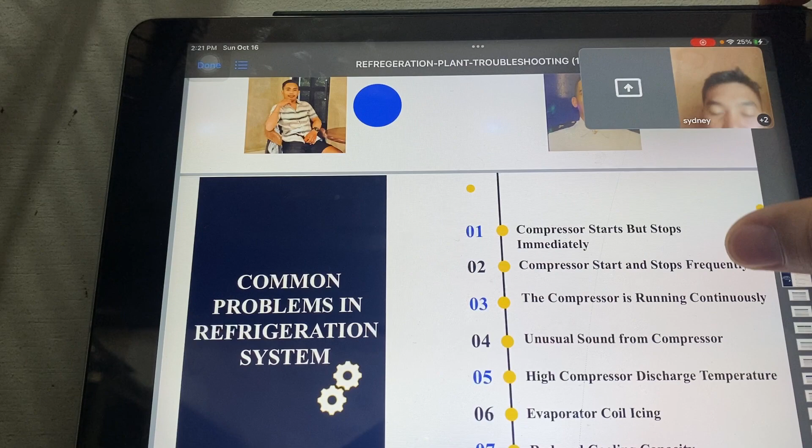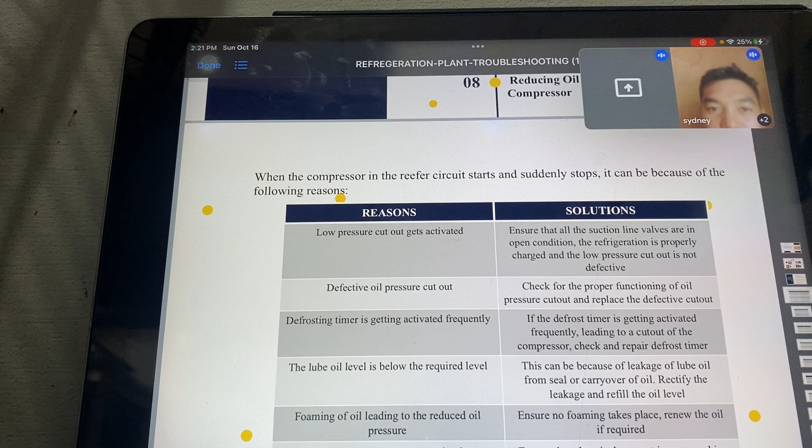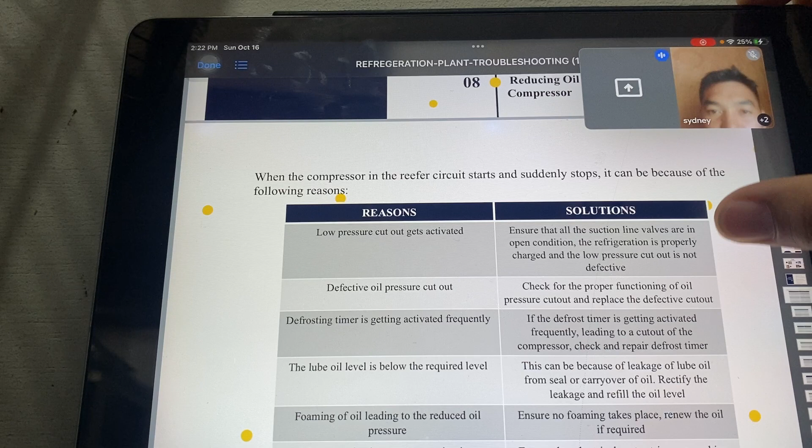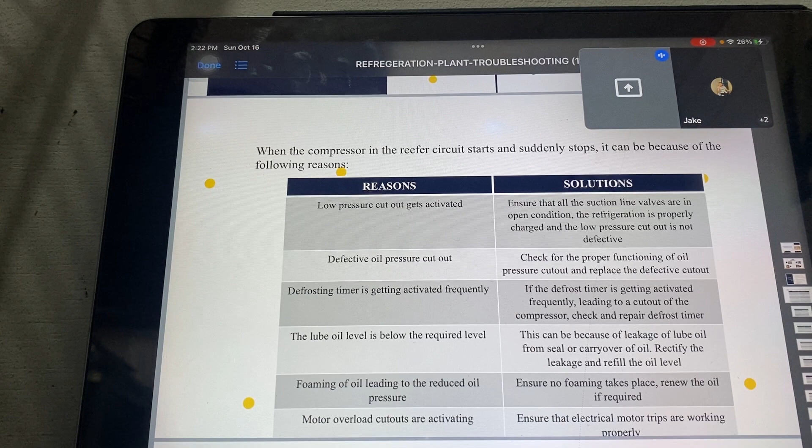So, the low pressure cutout gets activated. Second is defective oil pressure cutout. Third, the defrosting timer is getting activated frequently. Fourth, the lube oil level is below the required level. Fifth, foaming of oil leading to reduced oil pressure. Sixth, motor overload cutouts are activating.

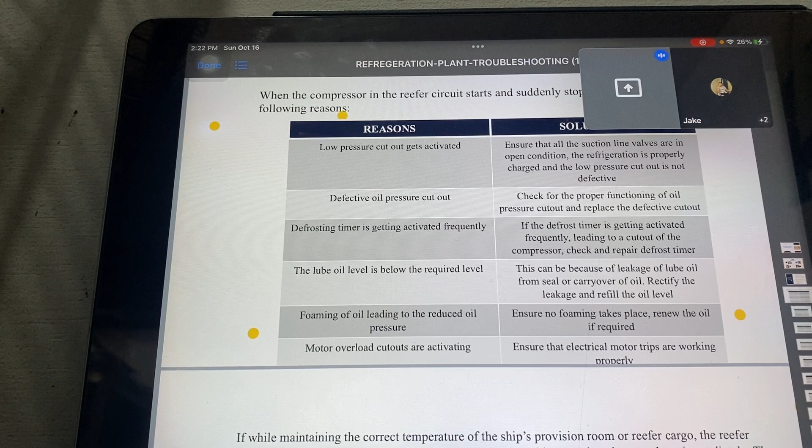So in troubleshooting, the solution for this is: first, ensure that all the suction line valves are in open condition, the refrigerant is properly charged, and the low pressure cutout is not defective.

Second, check for the proper functioning of the oil pressure cutout and replace the defective cutout. Third, if the defrost timer is getting activated frequently leading to a cutout of the compressor, check and repair the defrost timer. Fourth, this can be because of leakage of lube oil from seals or carryover of oil. Rectify the leakage and refill the oil level.

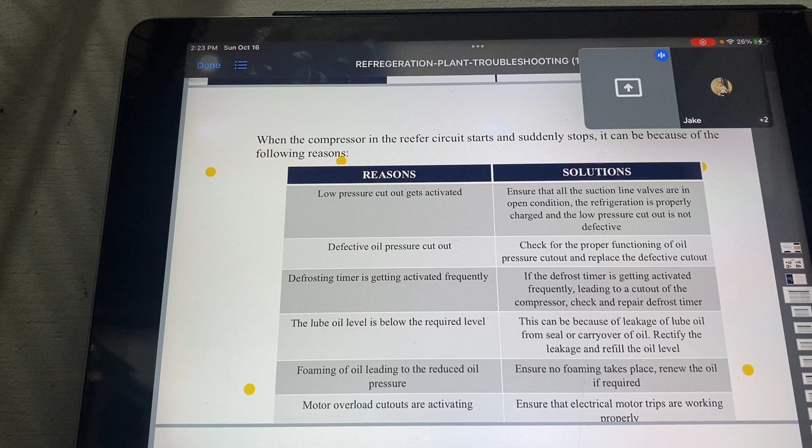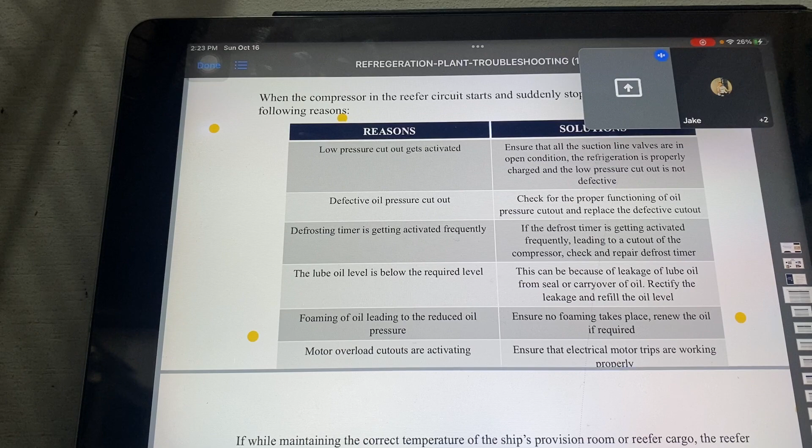Next, ensure foaming does not take place; renew the oil if required. Sixth, ensure that electrical motor trips are working properly.

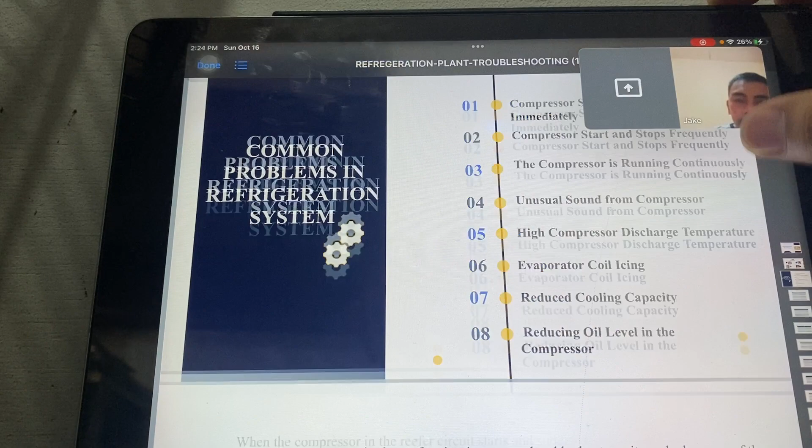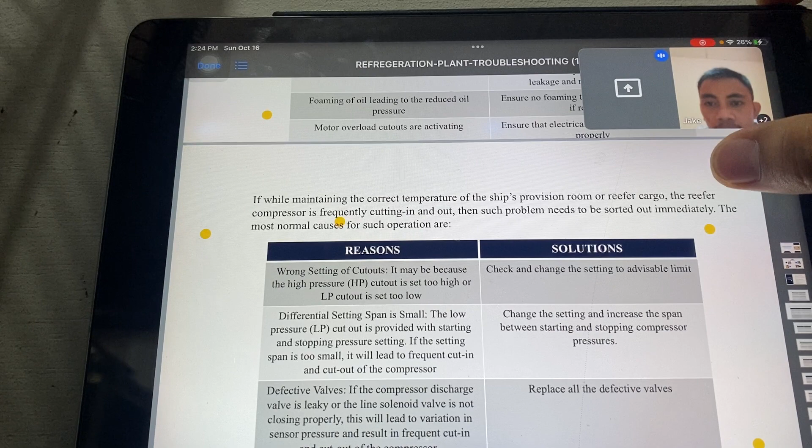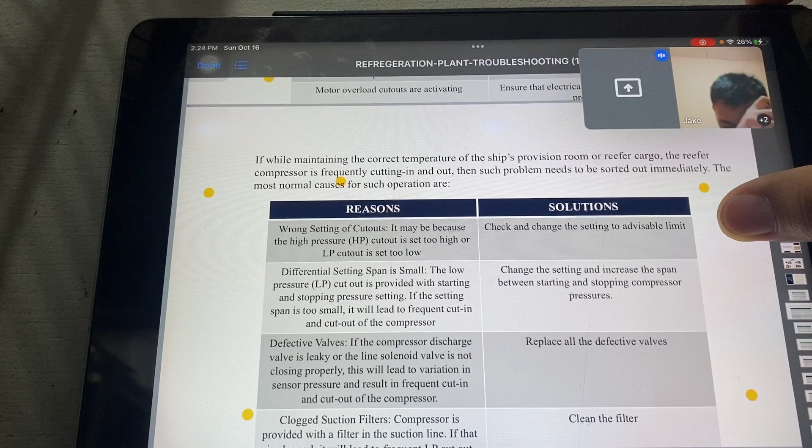So the second problem is the compressor starting and stopping frequently. While maintaining the correct temperature of the ship's provision room or reefer cargo, the reefer compressor is frequently cutting in and out. Such a problem needs to be sorted out immediately. These are the most common causes for such operation, and the reasons why it starts or stops frequently.

First is wrong setting of cutouts. It may be because the high pressure (HP) cutout is set too high or the low pressure (LP) cutout is set too low, or the differential setting span is too small. The low pressure LP cutout is provided with a starting and stopping pressure setting. If the setting span is too small, it will lead to frequent cut-in and cut-out of the compressor, so it will not work correctly.

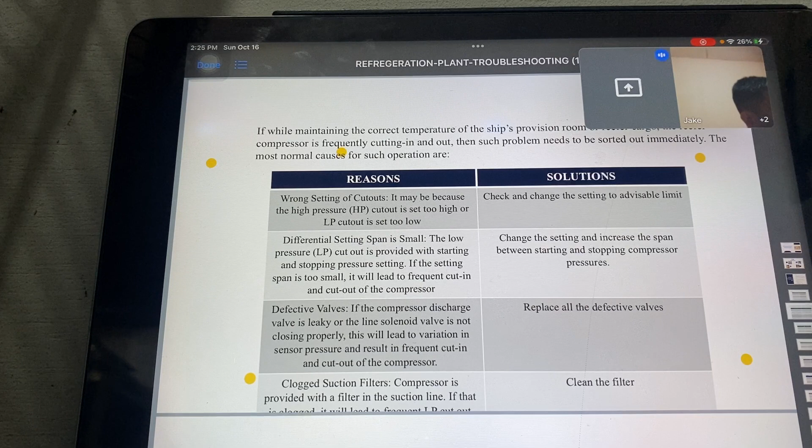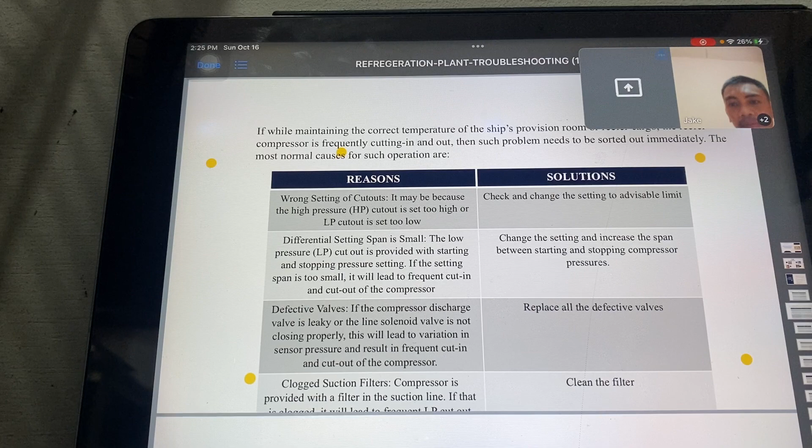Next is defective valves. If the compressor discharge valve is leaky or the line solenoid valve is not closing properly, this will lead to variation in sensor pressure, resulting in frequent cut-in and cut-out of the compressor. Next is a clogged suction filter. The compressor is provided with a filter in the suction line. If that is clogged, it will frequently trip the low pressure cutout.

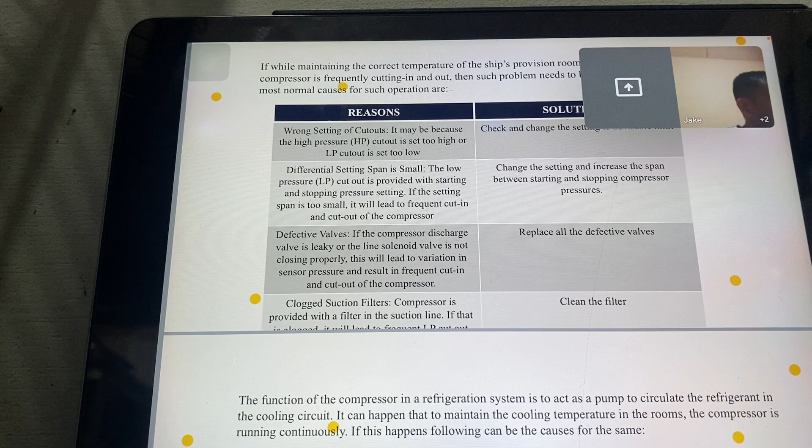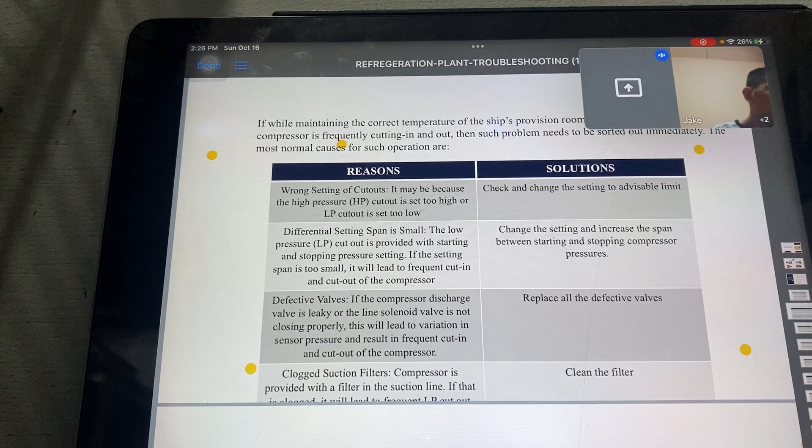So this is the solution: always check and change the setting to the advisable limit. Change the settings and increase the span between the starting and stopping compressor pressure. Replace all the defective valves. Clean the filter.

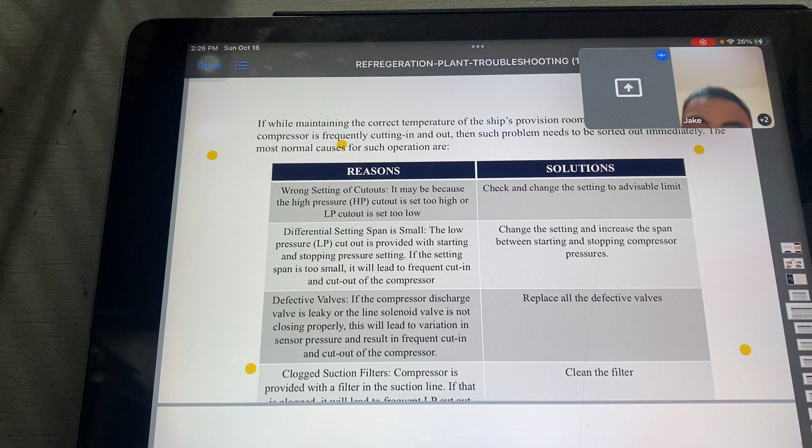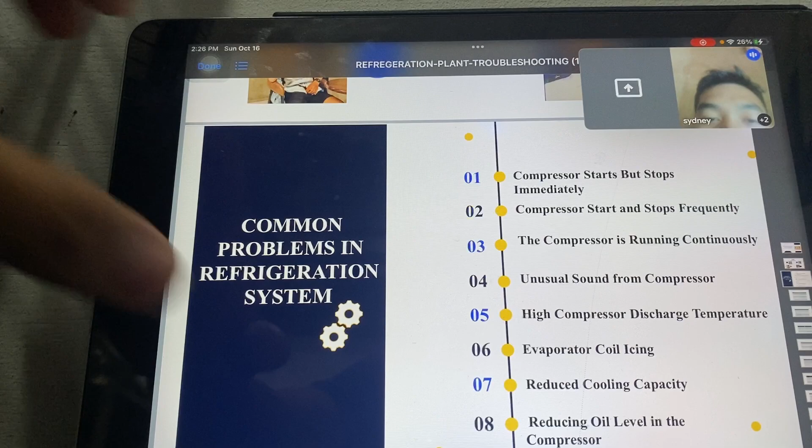Good afternoon, everyone. I will continue the report of Mr. Montibon, about the compressor running continuously.

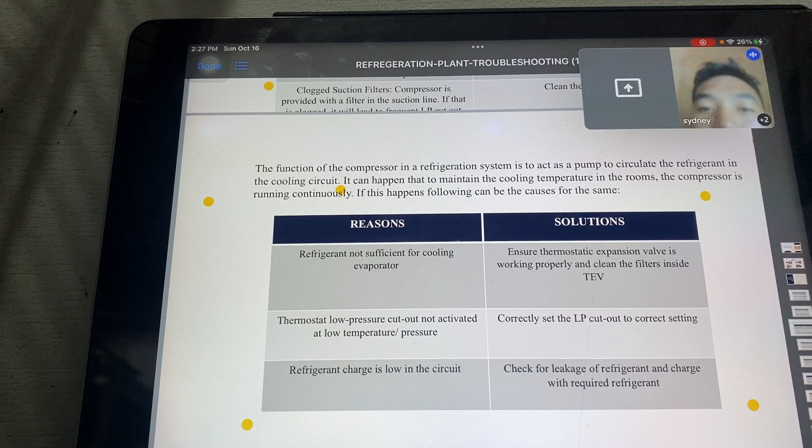The function of the compressor in a refrigeration system is to act as a pump to circulate the refrigerant in the cooling circuit. It can happen that, to maintain the cooling temperature in the room, the compressor runs continuously. If this happens, the following can be causes for the same.

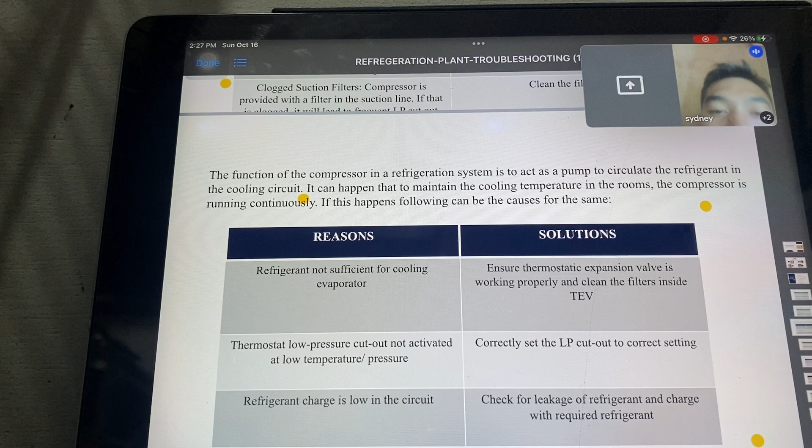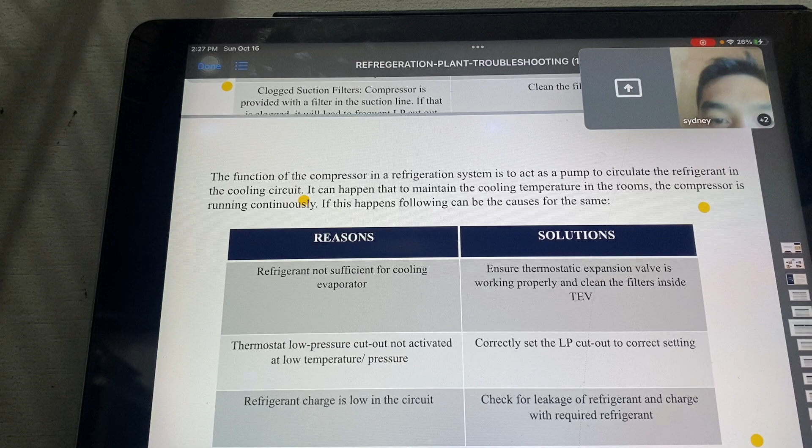So the most common reasons are: refrigerant not sufficient for cooling the evaporator, the thermostat or low pressure cutout not activating at the correct low temperature or pressure, and the refrigerant charge being low in the circuit.

So here is the solution: ensure the thermostatic expansion valve is working properly and clean the filters inside the TEV. Correct the setting of the LP cutout to the correct setting. Check for leakage of refrigerant and recharge with the required refrigerant.

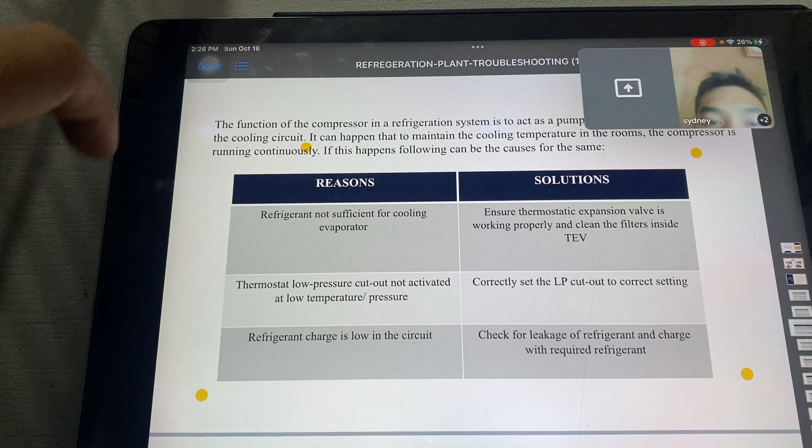Next, break. Number 4: unusual sound from the compressor.

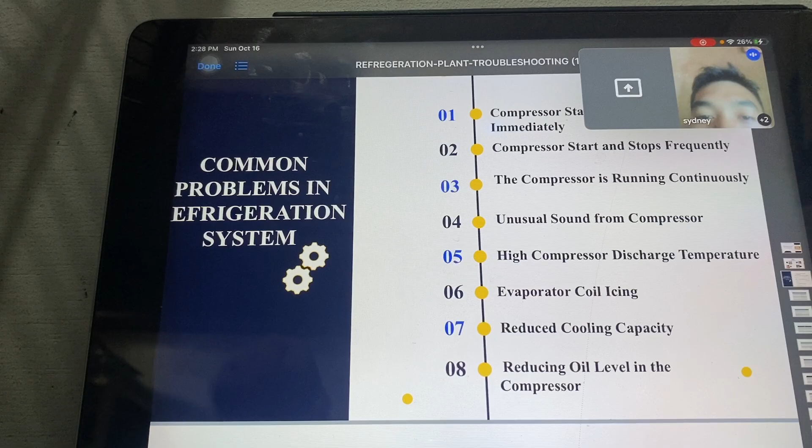One of the most common problems in any machinery is abnormal sound coming from some of its parts. This may be due to trouble with mechanical components inside the compressor or due to the reasons stated below.

Reasons: the capacity control setting is too high, leading to knocking sound during starting. The next one, the oil pressure is low. Incorrect alignment of compressor and motor. Lastly, loose foundation. Solution: reduce the capacity control setting.

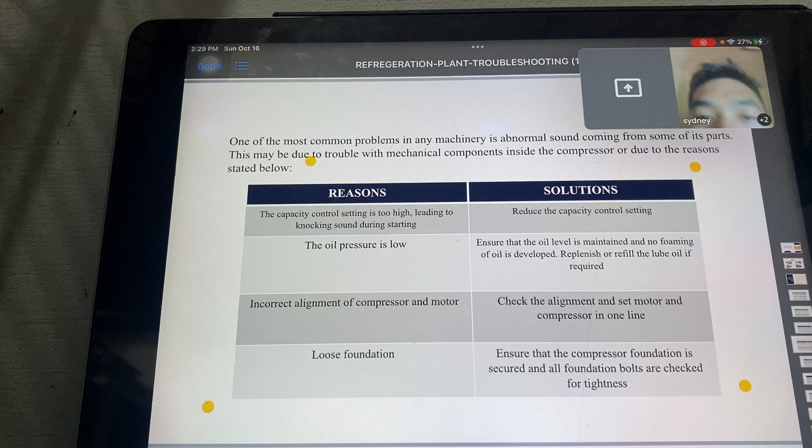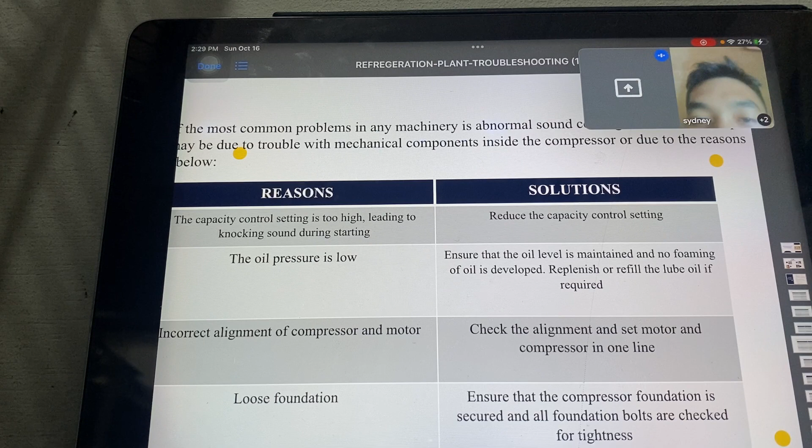Ensure that the oil level is maintained and no foaming of oil is developed. Replenish or fill the lube oil if required. Check the alignment and set motor and compressor in line. Ensure that compressor foundation is secure and all foundation bolts are checked for tightness.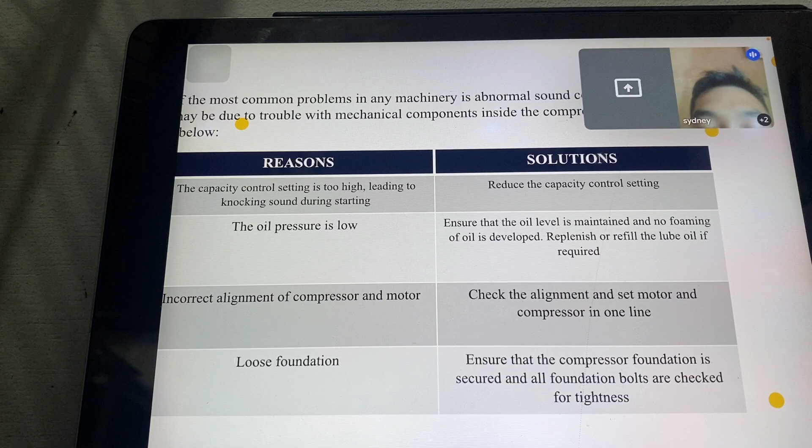Thank you, Mr. Digamo. So I will continue the reporting, which is number 5: high compressor discharge temperature.

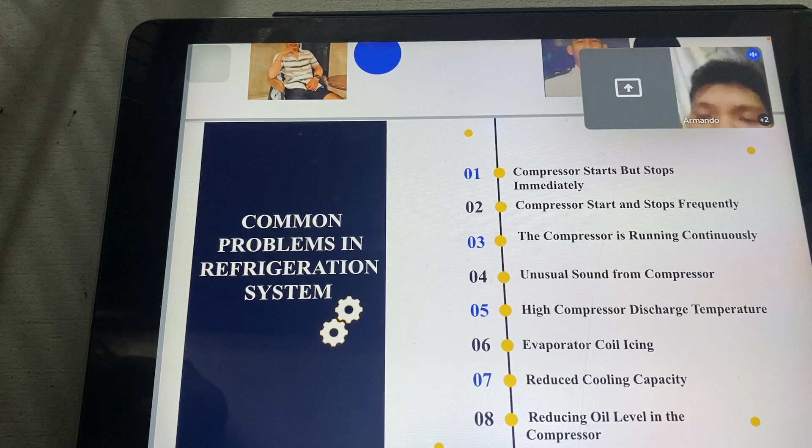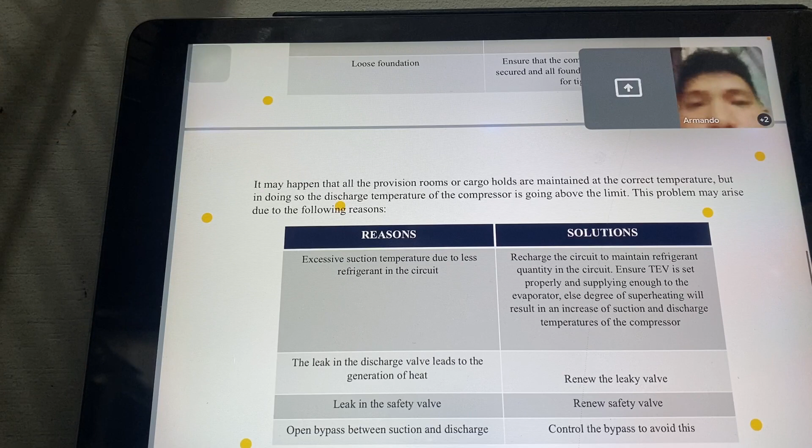It may happen that all the provision rooms or cargo holds are maintained at the correct temperature, but in doing so, the discharge temperature of the compressor is going above the limit. This problem may arise due to the following reasons.

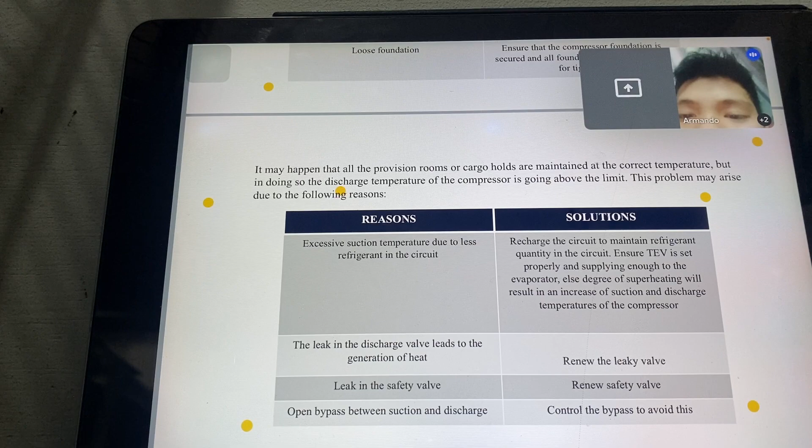Next reason is open bypass between suction and discharge. The solution for this is to control the bypass to avoid this.

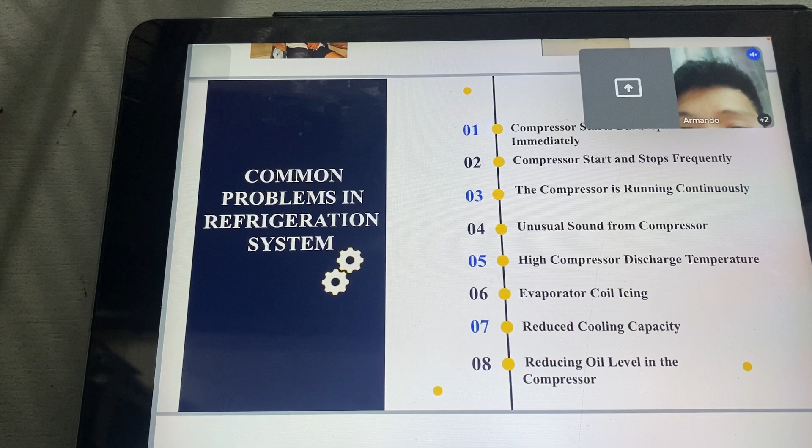So next, number 6: common problems in refrigeration system, which is evaporator coil icing.

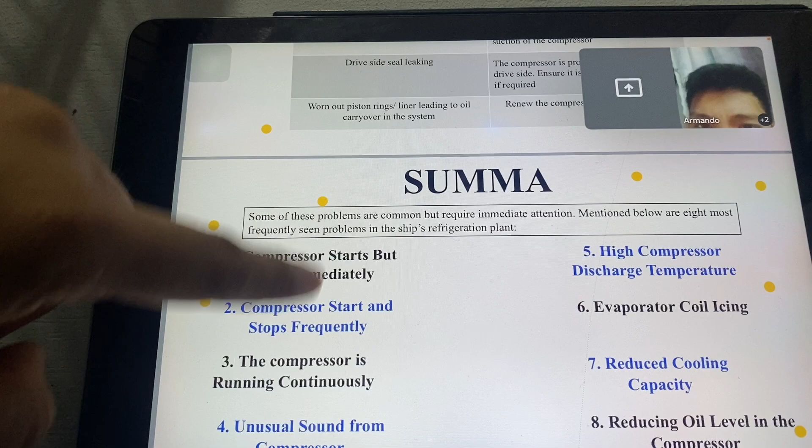Another common problem in the reefer system is the icing of the evaporator coils, which may happen due to reasons: too low temperature setting, the coil capacity is less, defrost is not operational.

The solution for this is increase the coil temperature by adjusting TEV or sensor. Install larger capacity evaporator coils and check if the defrost system is functioning at regular intervals.

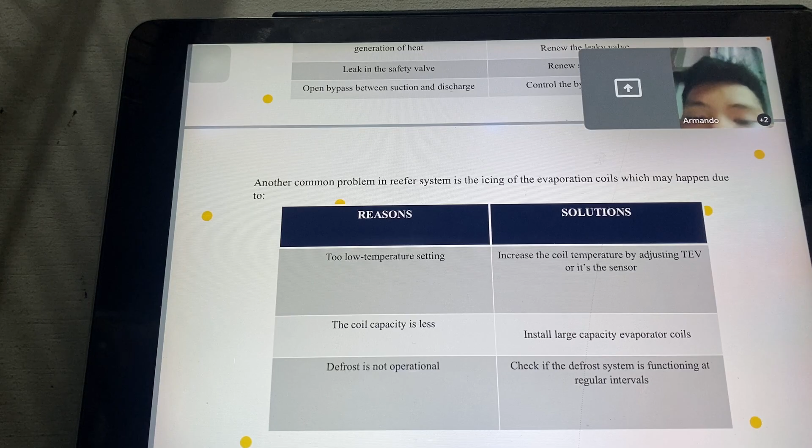Thank you, Mr. Armando. I will be the one to be the last reporter, continuing about the troubleshooting.

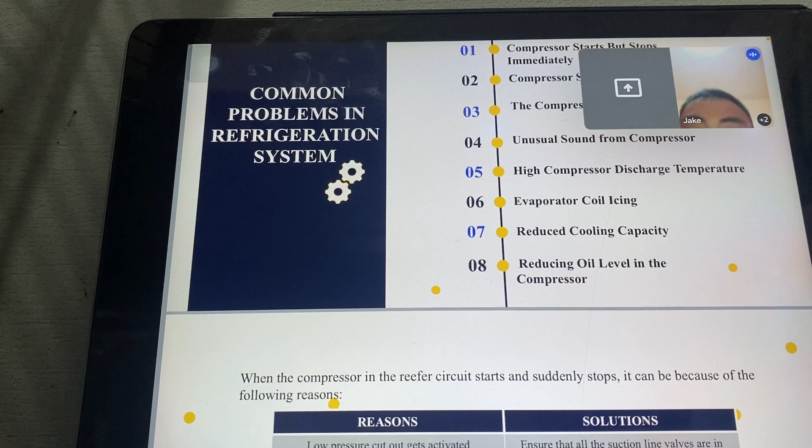Number 7 is reduced cooling capacity. If the cooling capacity of the plant has reduced and it is not being able to maintain the provision room or cargo hold temperature, the following may be the causes.

First reason is inadequate refrigerant. The solution for this is charge refrigerant in the circuit.

Next reason, insufficient or damaged insulation in the room. The solution for this: check and renew the insulation.

Third is room or hold is overpacked. Solution: ensure that the room is not filled above its capacity.

Fourth reason, malfunctioning solenoid or TEV. Solution: check the functioning of these valves and renew if not functioning properly.

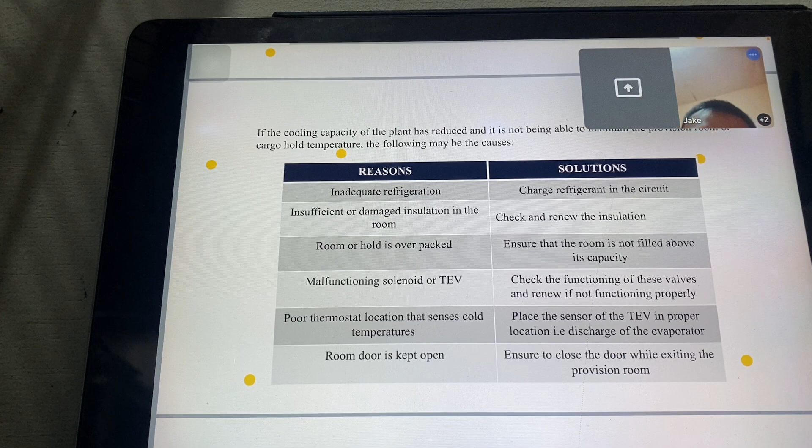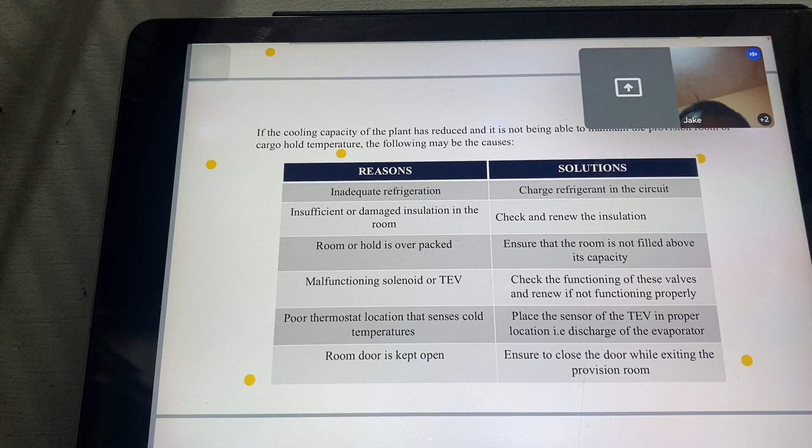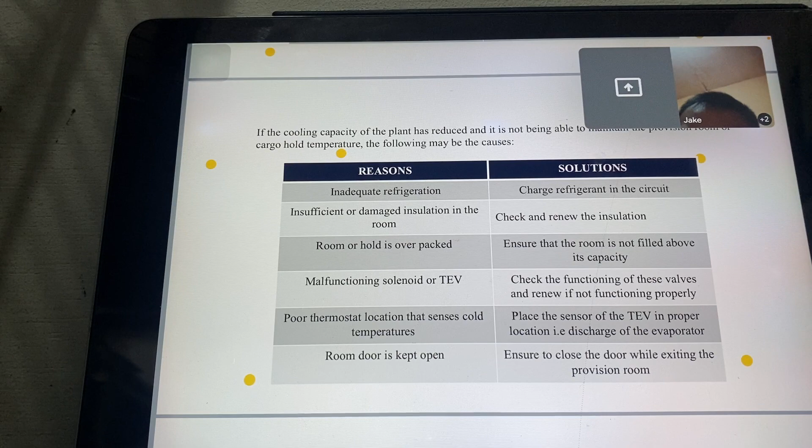Next reason, poor thermostat location that senses cold temperatures. Solution: place the sensor of the TEV in the proper location, at the discharge of the evaporator. Last, room door is kept open. Solution: ensure to close the door while exiting the provision room.

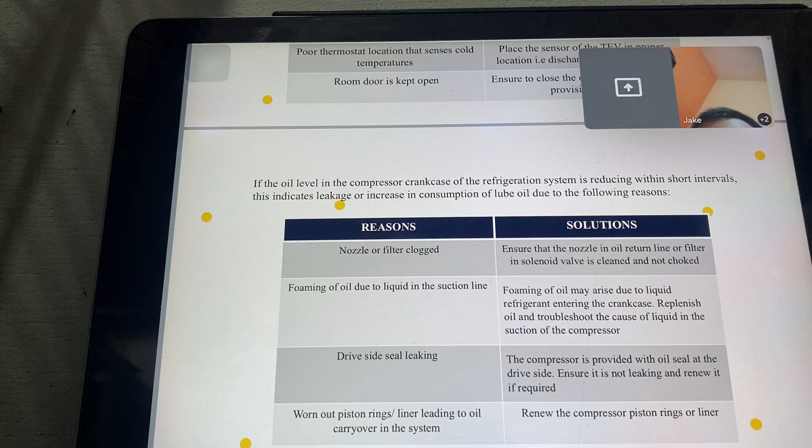The last troubleshooting is reducing oil level in the compressor. If the oil level in the compressor crankcase of the refrigeration system is reducing within short intervals, this indicates leakage or increase in consumption of lube oil due to the following reasons.

First reason, nozzle or filter clogged. Solution: ensure that the nozzle in the oil return line or filter in the solenoid valve is clean and not choked.

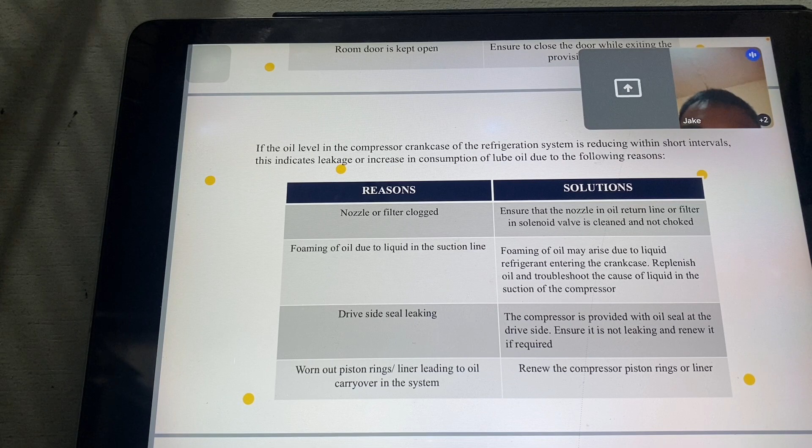Reason: foaming of oil due to liquid in the suction line. Solution: foaming of oil may arise due to liquid refrigerant entering the crankcase. Replenish oil and troubleshoot the cause of liquid in the suction of the compressor.

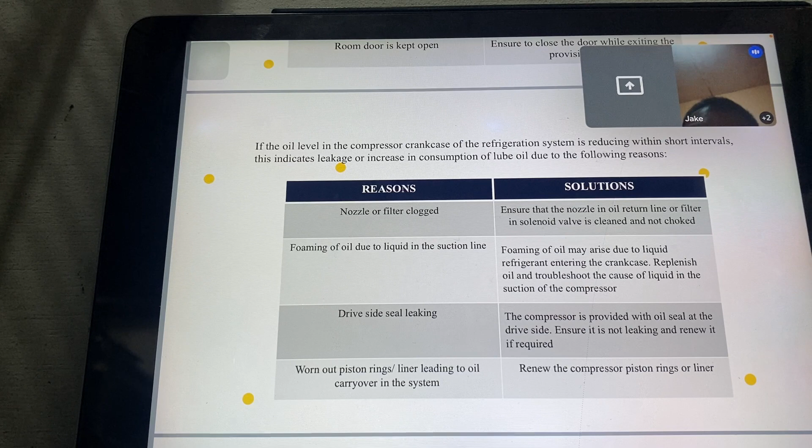Third reason is the drive side seal leaking. The solution for this is the compressor is provided with an oil seal at the drive side; ensure it is not leaking and renew it if required.

The last reason is worn out piston rings or liner leading to oil carryover in the system. Solution for this is renew the compressor piston rings or liner.

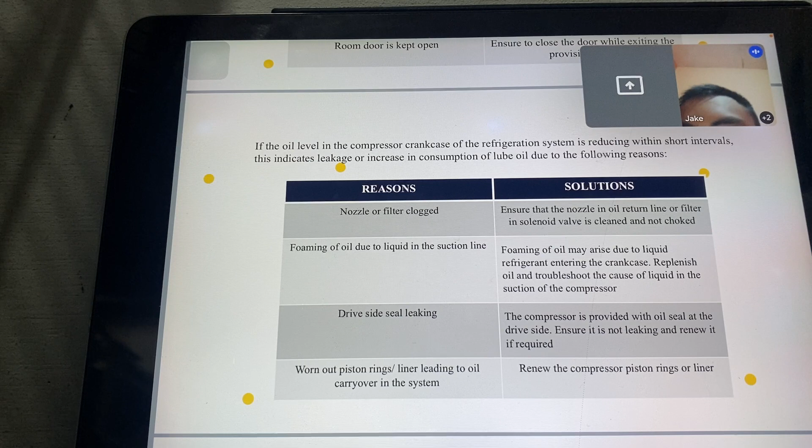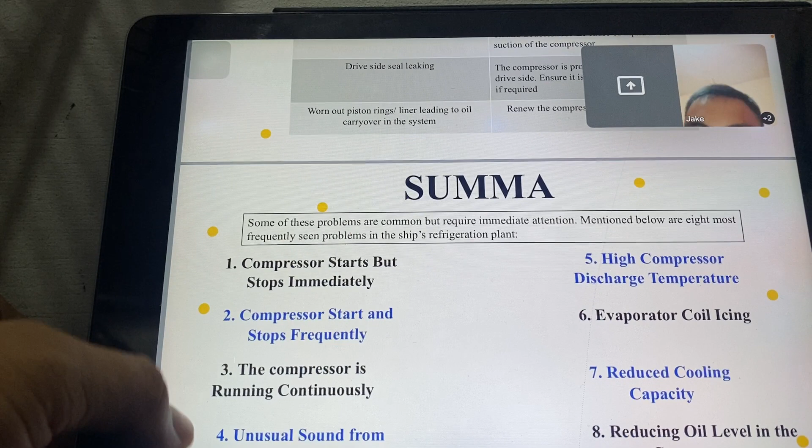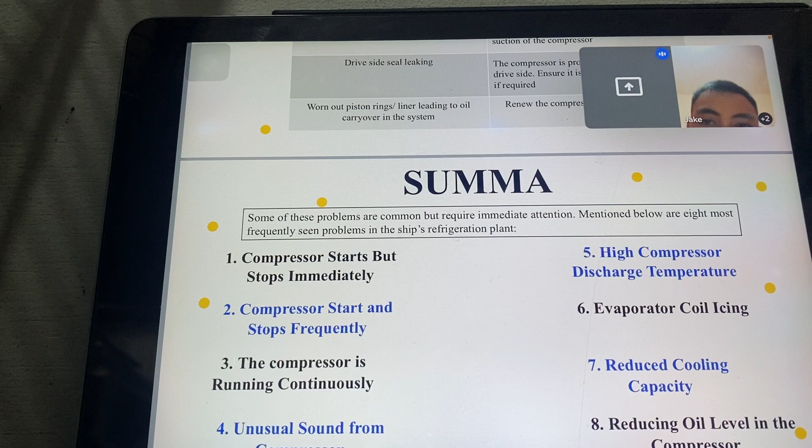Alright, thank you, Mas As. So in summary, some of these problems are common but require immediate attention. Mentioned below are the 8 most frequently seen problems on the ship. So that's all the 8 common problems and how to troubleshoot the problems about the refrigeration plant used on board ship.